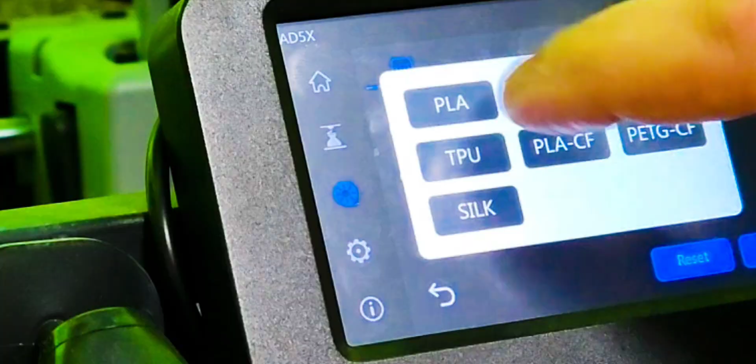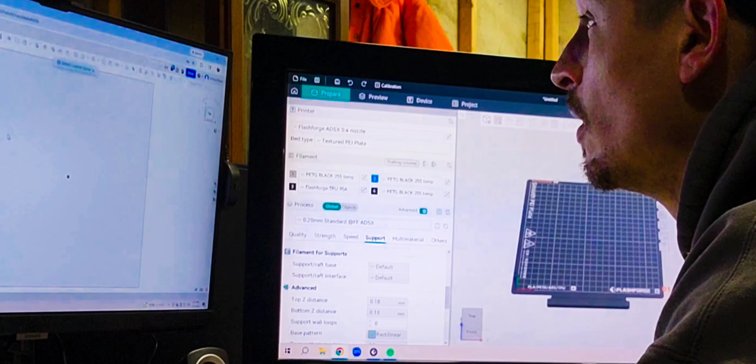Alright, so we're back to the same program again, Onshape Online. We're going to do a sketch, and in this very center of the sketch, on the top plane, we're going to do a circle center point. Make it whatever size you want. This is kind of what I like about this. Whatever size I want to fit something, I can make it.

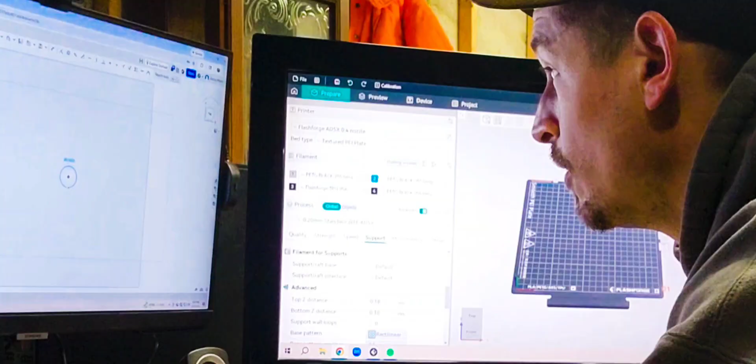So for this test, we're just going to go 3/8, 0.375. And then I'm going to do another circle around it, 0.5. And that's going to be the head of my bolt.

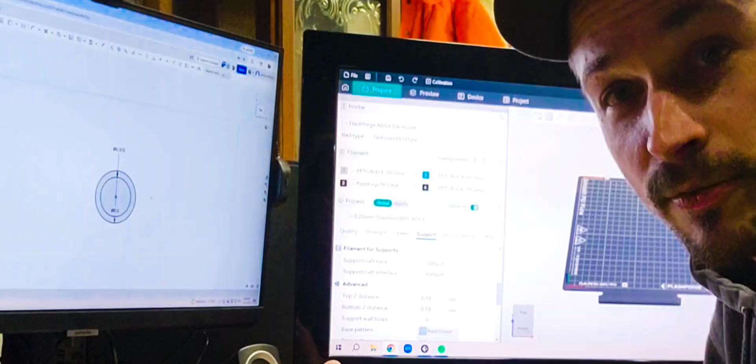Now these, for printing bolts for me, I don't want to have to get out tools. I want to be able to use my hands to tighten, loosen everything as much as possible. There's probably many different ways of doing this proper. I haven't lived 37 years of my life doing things mostly proper, so this is no different.

I'm going to make this bolt thread whatever size I want. I'm going to make the nut whatever size I want to match it. I don't know if any of the numbers even make sense for what they are, but it's what it creates, and it works. So here we go.

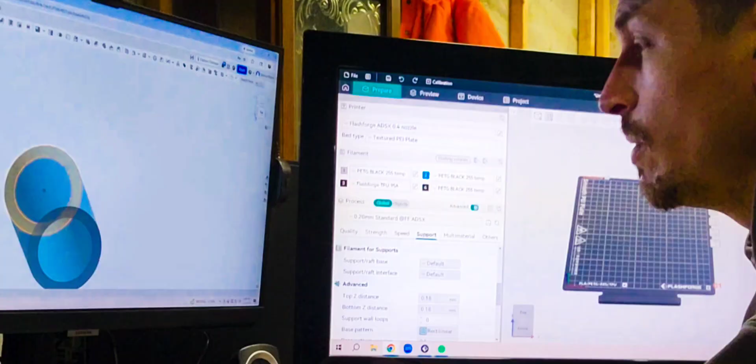So you're going to have that top sketch, and then we're going to do an extrude, and I don't want to do the whole thing 1 inch. I want the grip that I have to be a half inch tall. Yeah, that's probably even a little bit too much. Let's go 0.25. Extrude that, and then we're going to open up sketch 1 again and extrude it, the center this time.

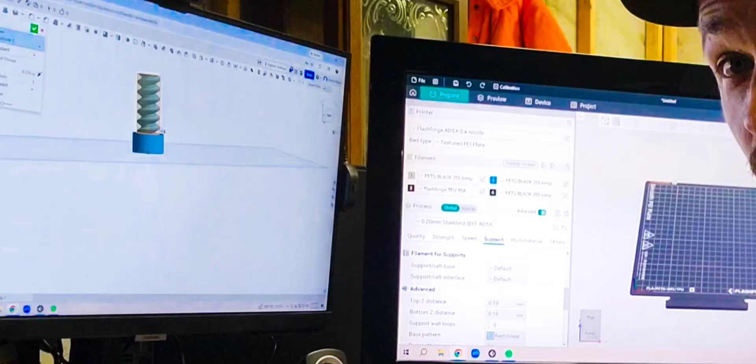Accept that, and now right here, this is a plug-in that you have to install on Onshape, but you have threading, thread creator. I'm going to create a thread on the outside of that diameter that I just set up, and as you can see, it's already throwing a thread on there. But this is what I like. This is a 3/8 thread right now. But I can make that pretty much whatever I want to make it possible to print it correctly.

You want at least a 45-degree angle. Anything beyond that, and that material can't hold up to that angle typically unless you use supports. If you use supports, it really doesn't matter. I don't want to have to peel supports off of this, so I'm making it as close to a 45-degree angle with those threads as I possibly can, and I'm doing that by eyeball.

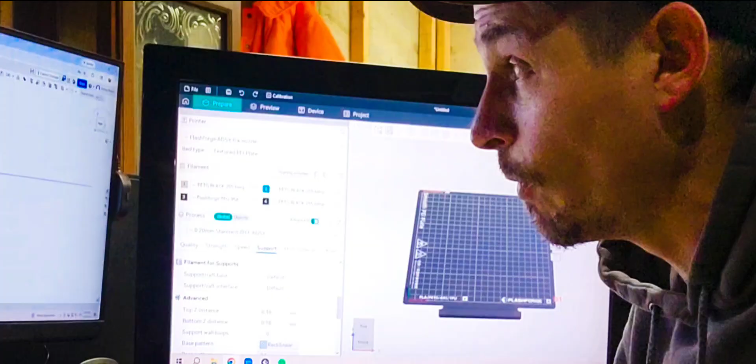And again, there's probably a better way to do that, but this is how I know how to do it, and it works. So that is how I'm showing you, and I will watch anything you send me on how to do this properly. So if there's better ways, which I guarantee there are, and you know it, just send them my way. But we already have a thread, but I want to make this whatever I want.

So I'm going to go to pitch up here, and I'm going to go 0.08, and we're going to see what that says. Well, that looks like a lot probably stronger of a bolt itself, because it's just a lot thicker in the center. And it looks like I'm still holding on to about that 45-degree on there.

So I don't want to go fully threaded. I only want to go a certain distance. We're going to go 1/2 inch. We're going to see where that brings me. Oh, that was the wrong one.

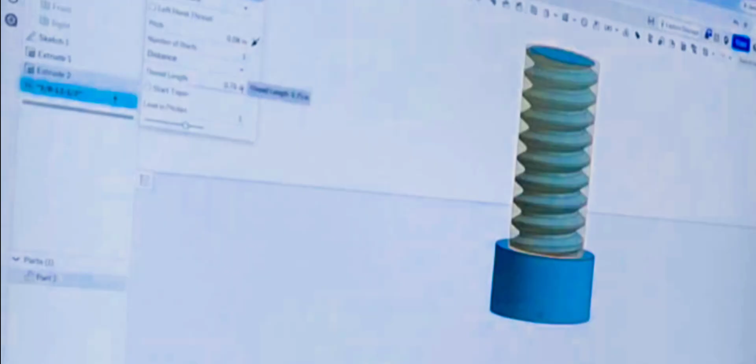So we're going to go thread length of 0.75. And that leaves me some of my bolt unthreaded. And that'll probably be what fits through whatever piece this goes through later. So now I have a thread, 0.08 pitch. It is a 3/8, 12.5 right now.

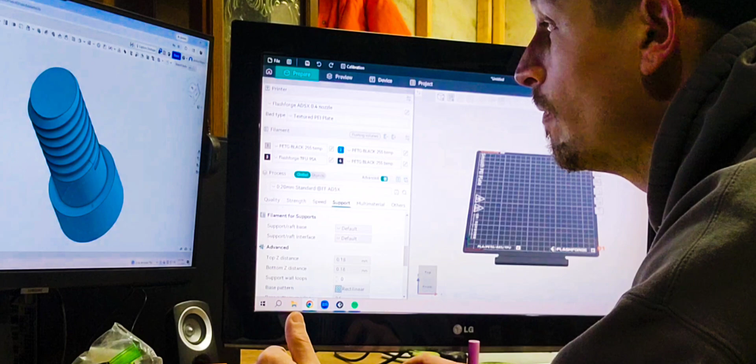Now for strength, I am going to add a fillet down here, right where they meet. And 0.05, let's go 0.06, just to give it strength. If you have a straight wall, and this is something I've learned through my job, anything coming straight down onto a surface is more likely to snap off at that point. If you radius that, or put a fillet on that, it has more strength there at that corner.

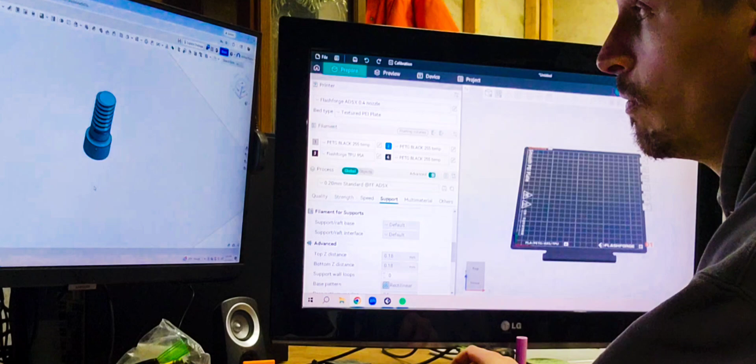So I add a fillet there, and now I essentially have my bolt set up. Now I want to take this end right here and do a sketch on it, just to give myself something to grip. I'm not going to go with the T-handle on it. I'm going to keep this one round so it's an easier print.

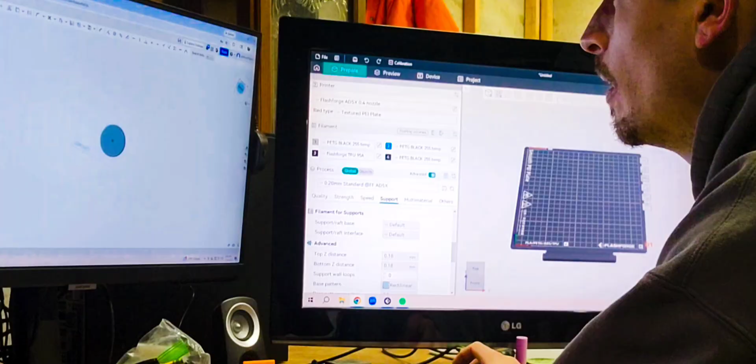For myself, I do a sketch right on that center plane. I'm on the bottom of this now, and I do a line right from the center and come up to the top. Again, this is just how I've figured out it works. I don't know anything about concentric, coincident, parallel, tangent, horizontal, vertical, perpendicular, equal, midpoint, none of that. I don't know what it all means as far as drawing and designing.

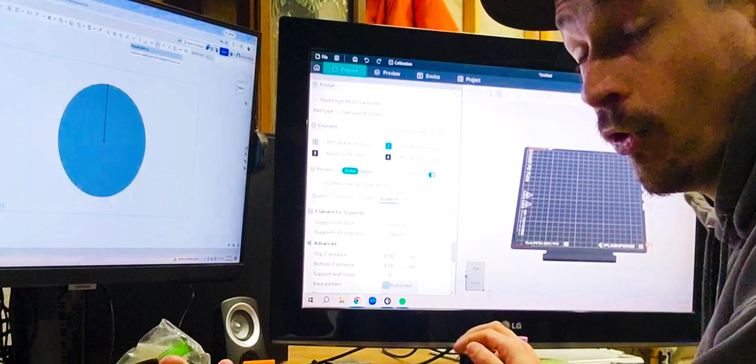I know that a lot of times my parts go, oh, that's not going to work, and then I print it and it still works. It just doesn't like how I draw, because I draw with crayons and this wants me to use a very nice pen.

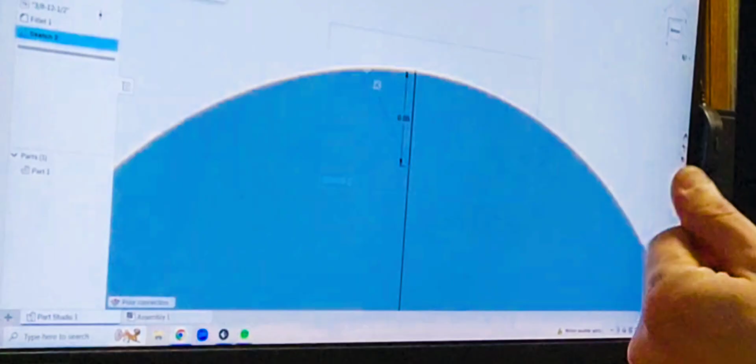So I'm going to take that center point now, and I am basically just going to draw a line off that center point straight down, and I'm going to go 50 thousandths. Then I'm going to go straight up to the next edge, and I don't really care what this angle is. I'm just trying to give myself something to cut out so that when you're trying to work that bolt, you have something to grip.

So I'm going to go straight to that corner, and then I'm going to come up here, select my center line that I drew, and I'm going to mirror that over.

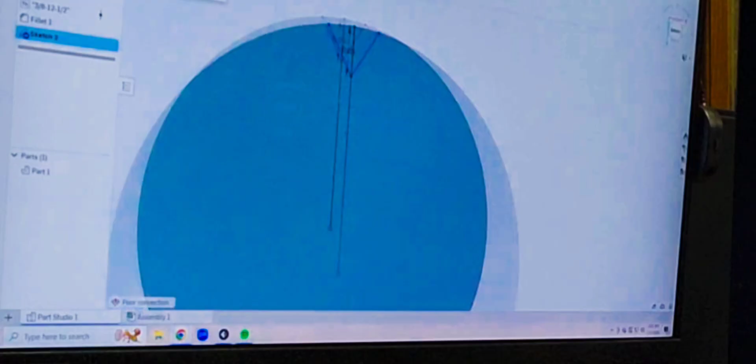Now if I accept that sketch, I now have two pies here, which should only be one, but with the fact that I drew this center line, it's splitting that into two parts. That doesn't matter. But I'm going to go back to that sketch.

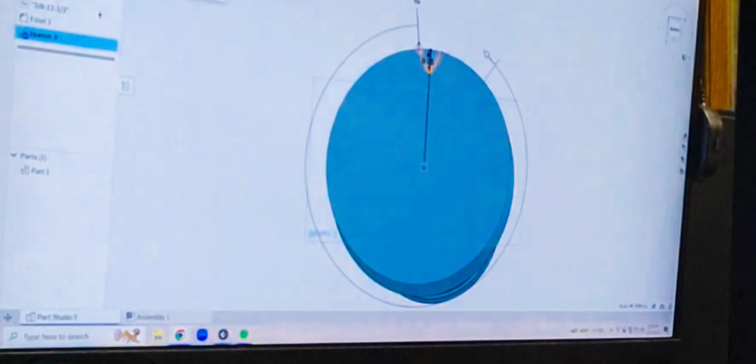I'm going to highlight both of those lines that I drew, and I'm going to come up here to circular pattern. Right now that is revolving what I just did around 360 degrees around that surface. I want, let's say, 8 of those little cutouts for grip. All of a sudden there's 8 of them on there.

Accept that. Now I'm going to just click sketch 2 because it is highlighted at that point. I'm going to hit extrude. That's probably not going to work.

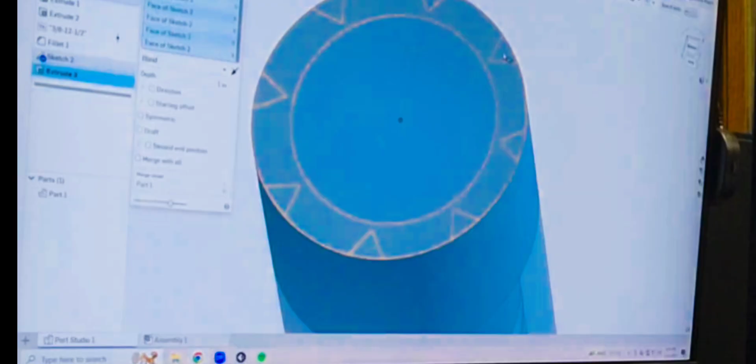Nope. But under extrude, I can select those surfaces that I created. And again, there's probably an easier way. If there is, I'm willing to learn it. But right now, for what I'm doing, this is getting me everything I need.

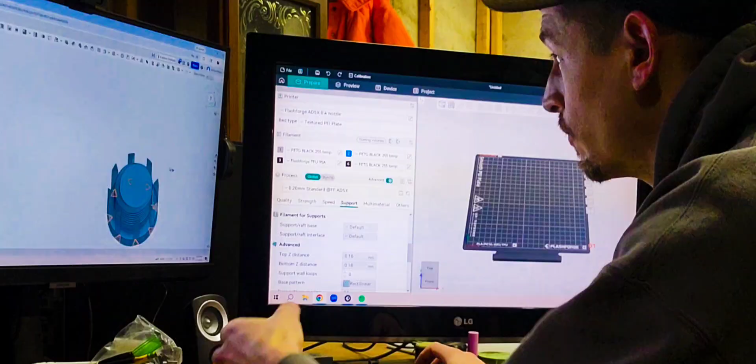Now, once again, extruding is trying to go positive, trying to bring those up. So if you can see those little triangles, it kind of looks cool, but it's certainly not going to work for what I need it to do.

So I'm actually just going to remove those, and then I have to reverse it so it knows to remove it through the part. And there, now I have a little spot with grips on the end of that bolt.

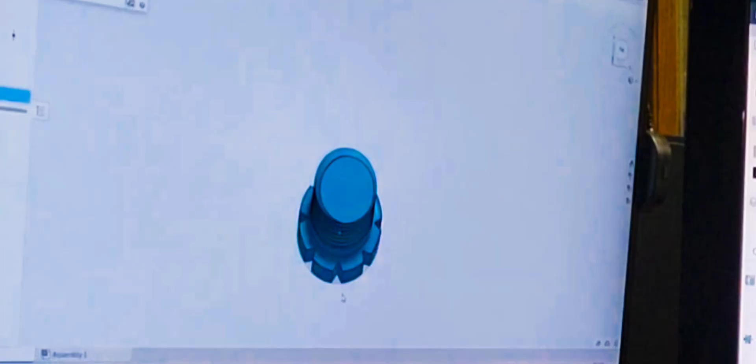So now we're going to come in here and make the nut for this. I'm going to go to the top plane, sketch, and make sure I'm clicking on the very top of that bolt. Then I'm going to do an inscribed polygon, and I'm going to make that 6-sided. Click, and I'm going to make that a half inch.

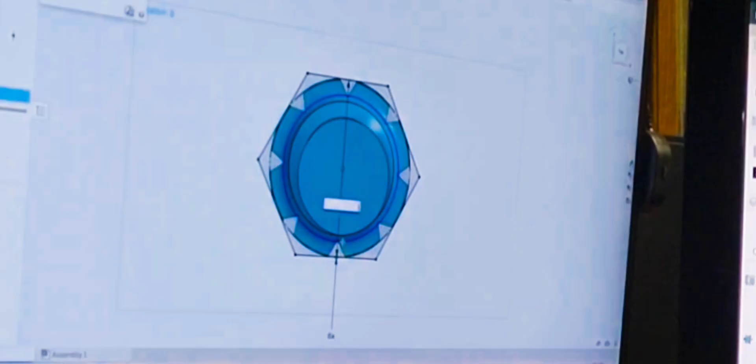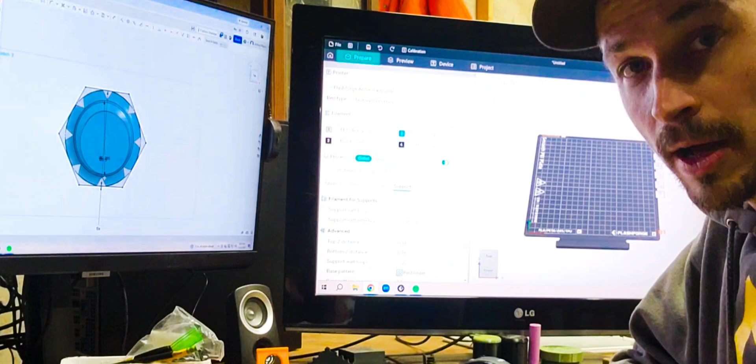And then right in the center of that, I am going to go 0.395. The reason for that is because my stud itself is 0.375. I know that I have about 10 thou worth of shrink or tolerance in this material with how it flows—it'll close up a hole a little bit, so I've learned that I have to go about 10 to 15 over right off the bat. Sometimes 7, it just depends on the material. But right now I'm going to go 20 thousandths oversized, only because from experience I know it works.

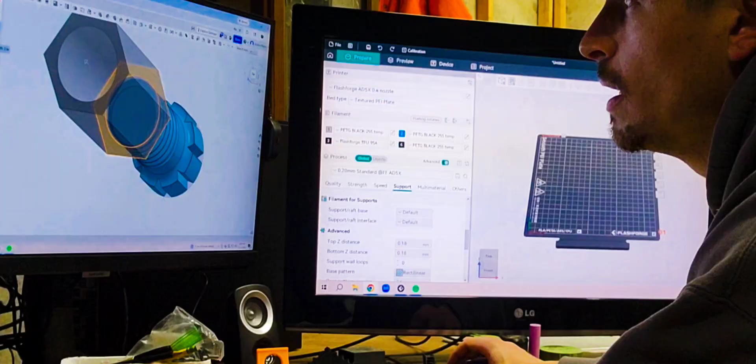If you were to do this, I would have very high confidence that you'd have success doing the exact same thing. So I have it at 395, 20 thou oversized right now. We're going to accept that sketch, and I'm going to extrude once again, going backwards this time because I want to see how it works. I'm going to go 0.25, and there you can see the actual nut that'll go around that bolt. Put the bolt back on, boom, there it is.

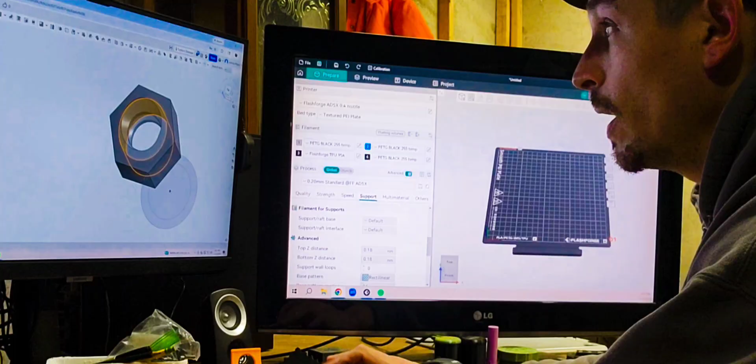Now, simple thread creator, I'm going to thread the inside of that, and go back to pitch, 0.08, to match what I put on the bolt. And there you have a nut and a bolt.

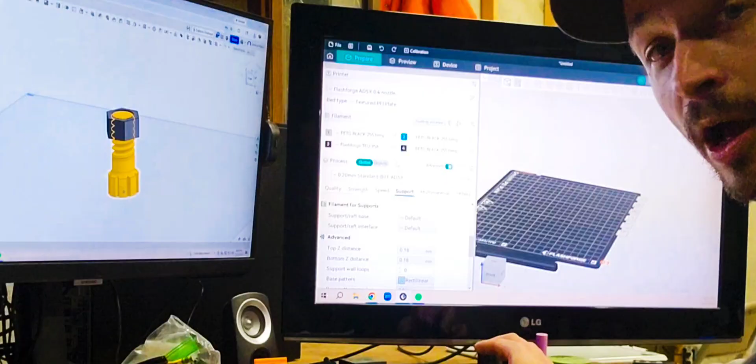Okay, now we're going to come over here to Orca Slicer. I'm going to print this on the AD5X today because I'm going to use 2 different filaments just for effect, just to play with different filaments and see how they turn out. So make sure your printer is selected correctly. Add from my downloads today, bolt and nut, open.

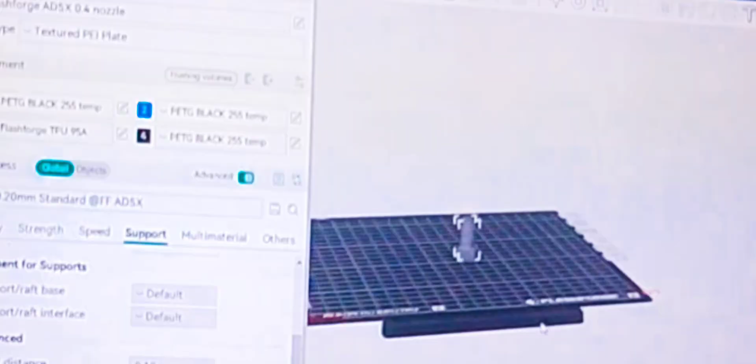Single object with multiple parts, I'm going to say no. So then I'm going to move this one over. It didn't want me to put that one there. So there's the nut and the bolt.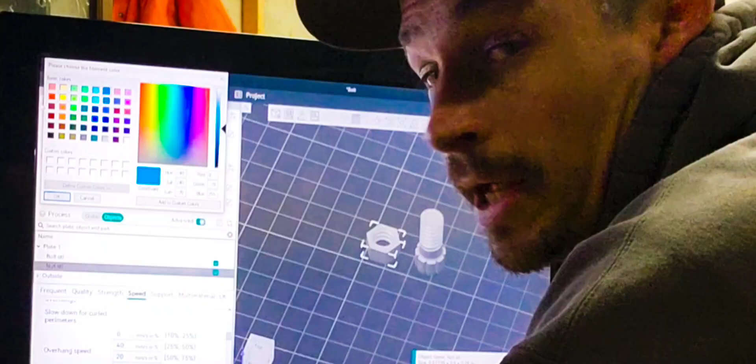Again, I have the FlashForge AD5X selected, and I'm going to come up here and change this. In slot 2 right now, I have orange PET G, orange, and I have PET G selected here. I have it labeled as black because it's a preset of mine for a temperature of 255 degrees, since that's where I'm finding very consistent flow and good prints. So they all say black right now because it's just one preset that I saved.

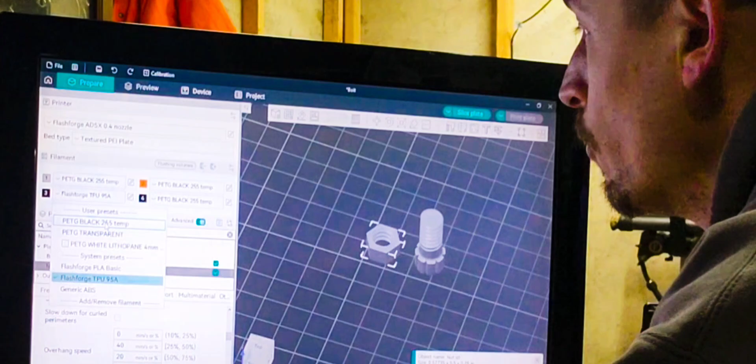Number 3 is not TPU anymore, that is also going to be PET G, and I'm going to change that to green.

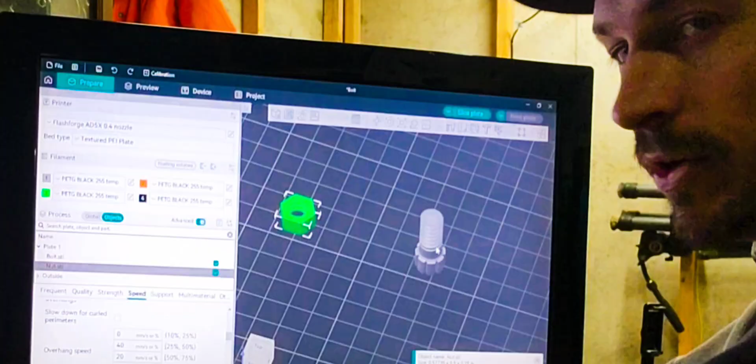Now I want to just print down here. You have global in process, you have global or objects. I'm going to go to objects, select the nut, change filament, and do the nut in green. I'm going to move that over a little bit, and there's a very specific reason why, I'll show you here in a minute. The bolt itself, I'm going to right click, change filament, go to slot 2, which is orange, and now I have an orange and green stud.

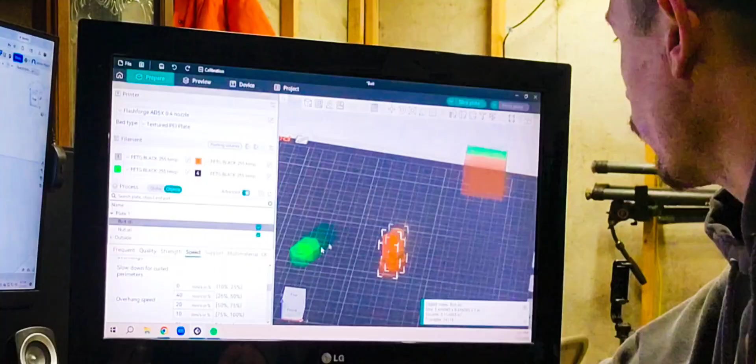Now the AD5X is a 4-color changer, so all 4 go to the same nozzle. It'll retract one, put in the next color, retract that one when it's done, put in the next color, and it'll just keep rotating through those 4 colors as much as you want. That's where you see this tower right here, called a prime tower. What it's doing is keeping everything at the same level so it can purge out the material.

One of my prints just fell apart.

It's going to purge out all the material from the nozzle and make sure it's not mixing colors between the 2 parts if I print this as a normal sliced print.

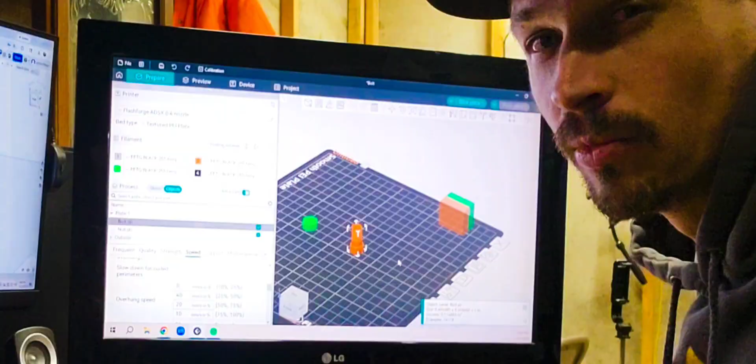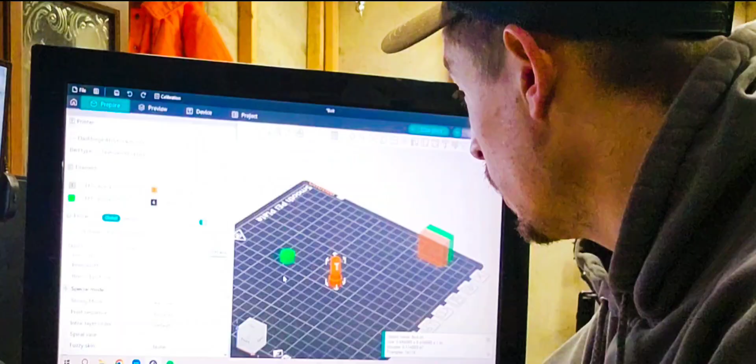So we're going to go back to global here, and then go over to others, and right here we have print sequence. Right now it's in layers, much like this stack of paper, this is how the 3D printer prints, in layers, page by page by page by page. That's how this works. So in order for a 3D printer to work, it has to stay on that same level, and if you have multiple color changes, it's going to come over and change colors to do that part at the same level on Z.

So I don't want to waste that much filament, because when you are doing multiple colors, it purges material out to make sure you're not mixing colors. Every time it does that, it essentially poops the material right out the back, and it's just wasted unless you have a recycler and a filament respooler and everything, which I do not.

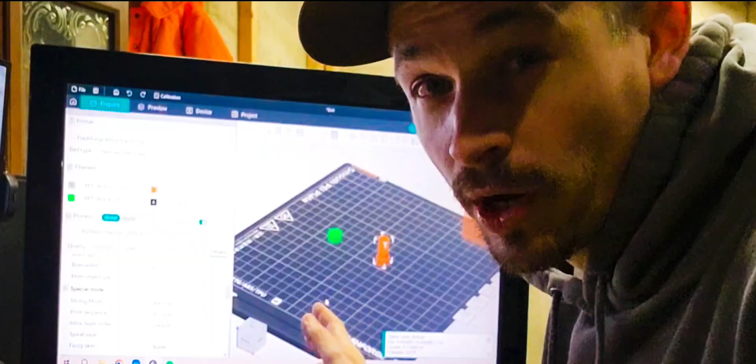So I found a way to avoid the multiple color changes and the overuse of extra filament. I don't like to waste filament if I don't have to. So if you come down here into others, you have print sequence, and it says by layer. That's where it would just stay on Z at the same level and constantly be changing colors. I'm going to do this by object.

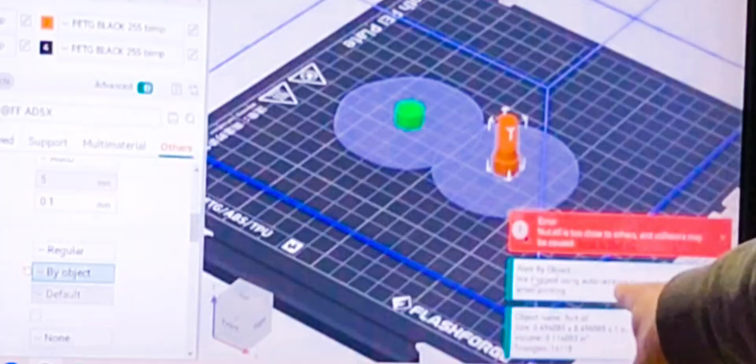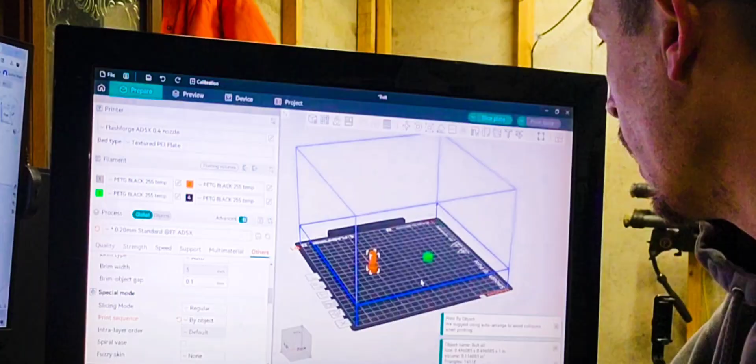And it's going to say we suggest using auto arrange to avoid collisions. Right here, as you can see, there's a blue, whatever color that is, circle around both those parts. That is where the actual head of the printer has to be able to move without colliding to the next part over. So you have to make sure that you're clearing that. And I can just come over here, select this one, and let's go. Okay, well, now it won't hit. Now it's no longer giving me an error.

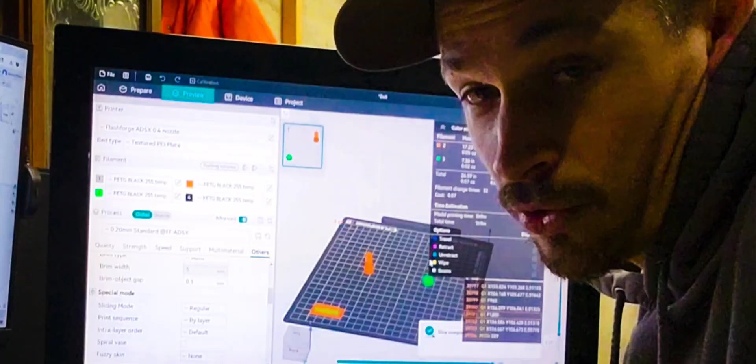If I slice that right now, this is a total printing time of 18 minutes and 29 seconds with this setup and 2 filament changes. That is it. But if I go back to by layer and I reslice it, that is now a total printing time of 1 hour and 9 minutes with a total filament change time of 32.

And every time that it does that color change, it throws material right out the back that it doesn't use. And that's money thrown in the trash can at that point. So I do by object right now. Saves money, saves time, saves a lot of time, over almost an hour.

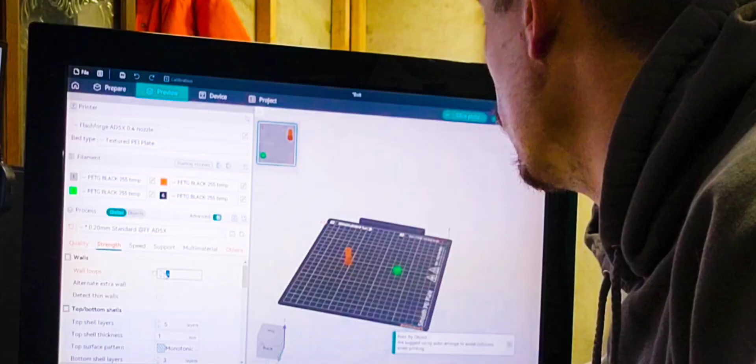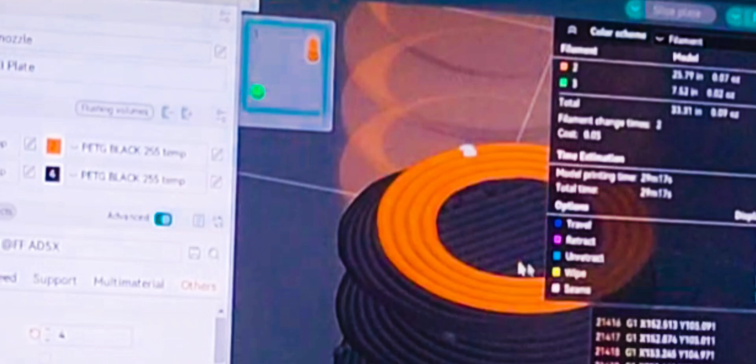Strength, I am going to do 4 wall loops because that'll give me the strongest stud without wasting too much extra material or anything. But more walls on a stud like that will add strength. So there's a wall, there's a wall, there's a wall, and there's a wall. So there's my 4 walls. The infill is only filling in right here in the very, very center. And for a test, that's going to be strong enough just to show that it works. We're going to slice it, send it over to the AD5X, and then watch it do its thing.

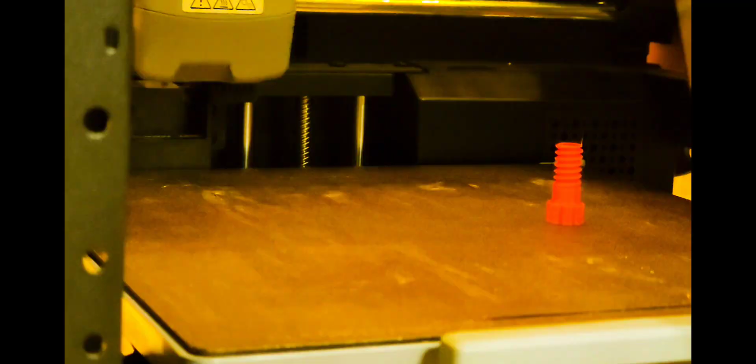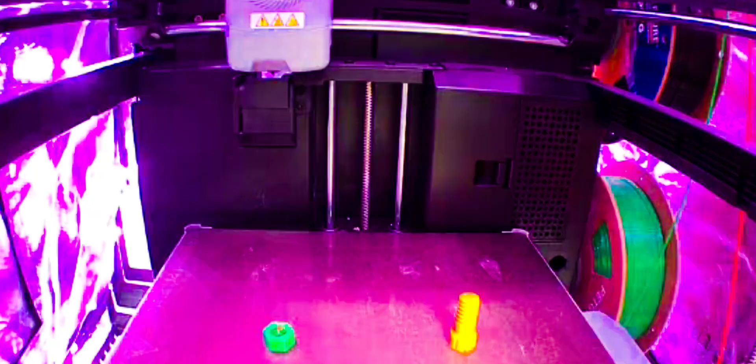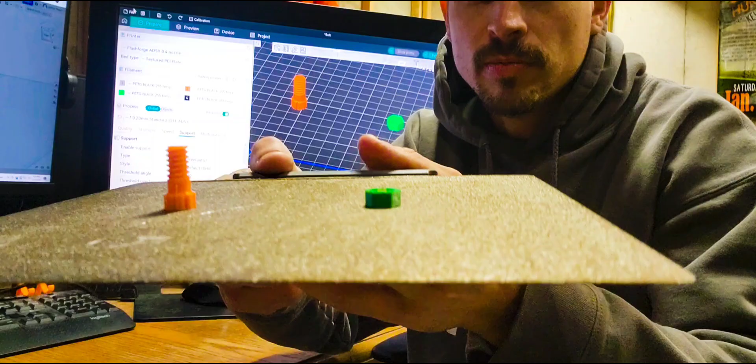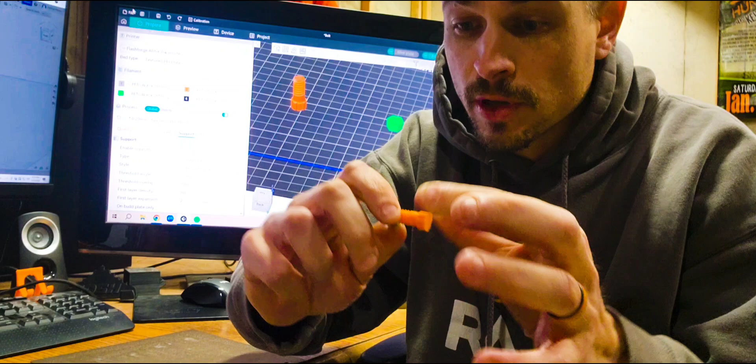Alright, here we go. Fresh on the build plate. If I tilt it too much, I think the nut's going to fall off there, but oh, they're both loose now, so there is the bolt. The nut is loose. There's the nut. Without touching them, I'm just going to see if it works. And sometimes they are tough to get them started the first time. It works.

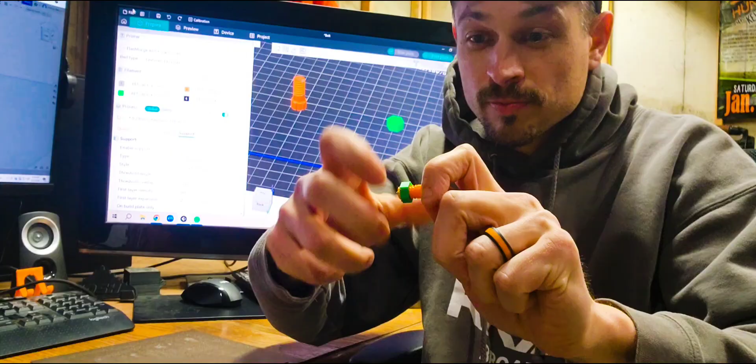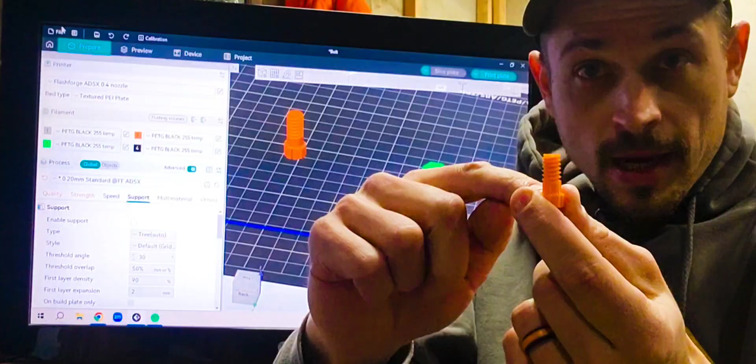Simple, quick design using Onshape. If you're ever in a pinch, you got a 3D printer, I need some bolts of this size just to do something small. I'm not saying bolt your truck tires on with 3D printed studs like this, but I am saying this will get you by and can work in a pinch for certain things. Now, because this all printed standing up, Z layers were across it, so the weakest portion of this bolt is going to be if you put downwards pressure across it.

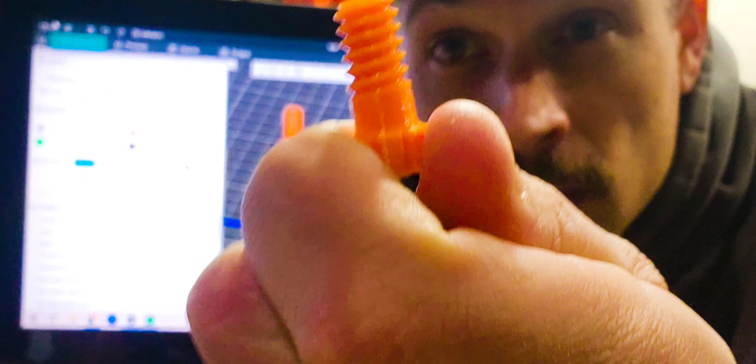You can do it with any size you need. I haven't gone down to like 1/8-inch size studs or anything like that because that is very tiny and I'd have to change the nozzle probably to a 0.25 millimeter for the details. But this stud right here printed almost perfectly. Doesn't look bad for being just a printed piece. Right away. 20 thousandths oversized on the nut, 375 for the diameter of the stud. Threads right in, it'll get you by, something to get you started at least with designing your own threads.

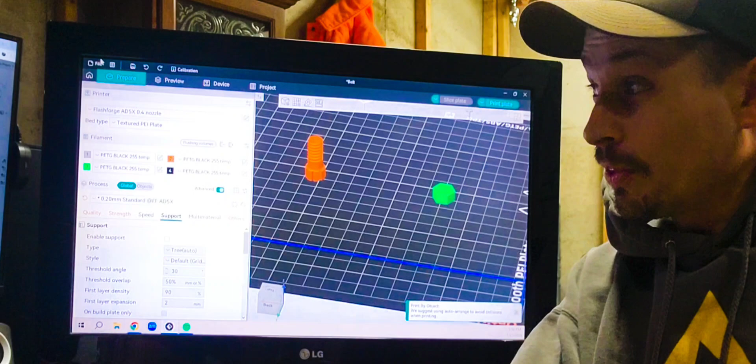So if you got a 3D printer, go try it for yourself. Make yourself one of a custom size. You don't always need to rush out and go to the store. That is one thing that I love about this 3D printer. During Christmas time, my wife and I went shopping for entirely too long for me to be in a store. We got home, she said, crap, I forgot the Christmas ornament hangers. We need to go back. This is my friend and saved me a trip to the store again.